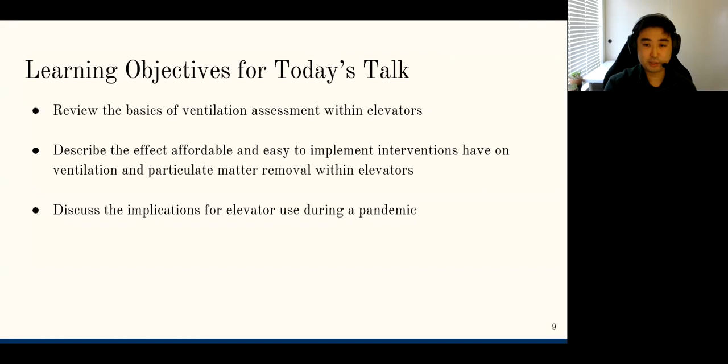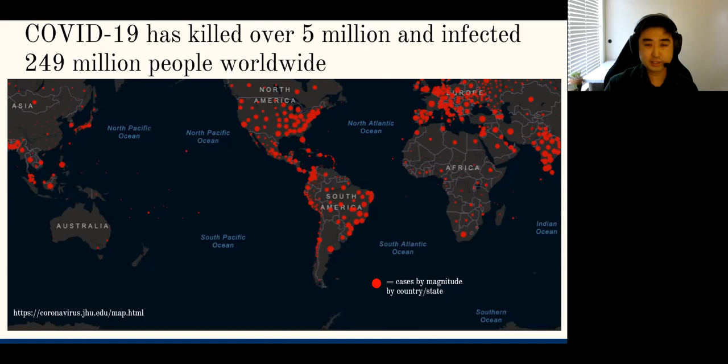So getting into the background and motivations behind this research. COVID has wreaked havoc and created a new normal for everyone in the world and has killed over 5 million people and infected 249 million people worldwide as of November 2021. It's well established that the SARS-CoV-2 virus is transmitted through the aerosol route in shared spaces.

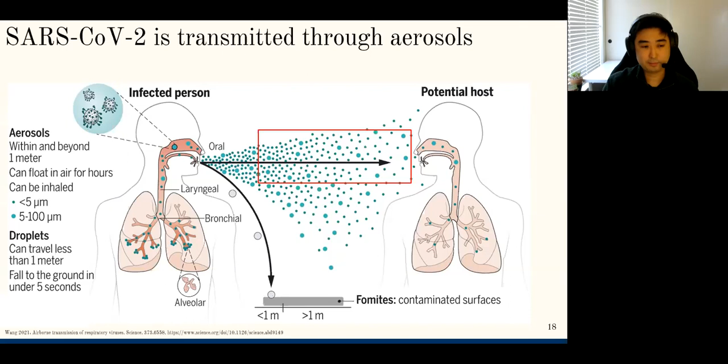The SARS-CoV-2 virus itself is 0.1 to 0.2 micrometers in aerodynamic diameter, but is often larger because it is contained within respiratory aerosols or droplets emitted from people, which typically are larger. And it varies based on the source of the aerosol or droplet production, i.e. a cough versus a sneeze versus just breathing.

And we care about the size because it affects how long it stays in the air, how far that aerosol can travel, how quickly it falls out of the air, how it interacts with the airflow, where in the lung the PM deposits, which relates to the health effects, and how it's removed from a given space. This last point, how it's removed from a given space, is what I'll be focusing on in today's talk.

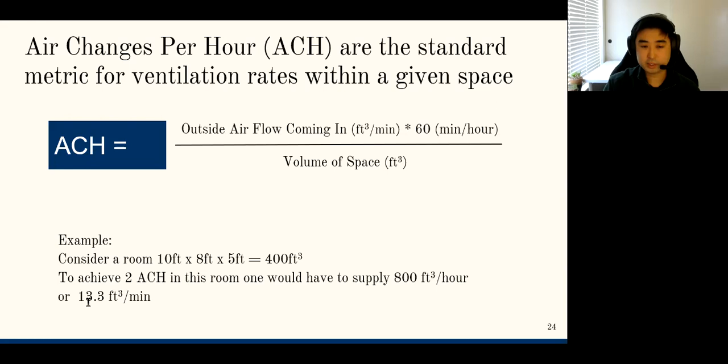So for our study, the air change rate or air changes per hour is the decay rate of aerosols or tracer gases as their proxies for ventilation inside of an elevator. By understanding decay rates of particulate matter and tracer gases inside an elevator, we can calculate the air change rate. This is a very important concept for today's talk. By measuring the rate of decay of these aerosols or particulate matter or tracer gases inside the elevator, it gives us an idea of the ventilation.

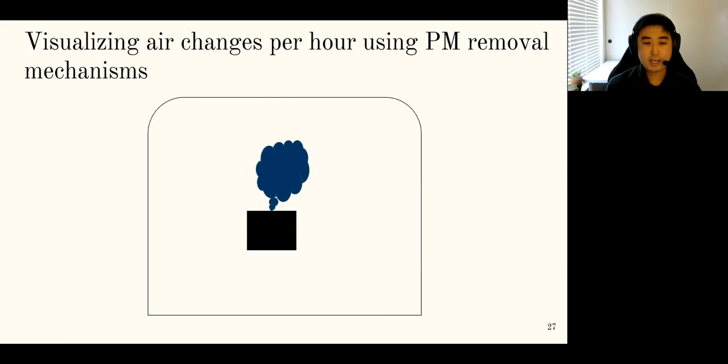So visualizing air changes per hour using particulate matter removal mechanisms. Let's just say this is an enclosed box with some outlets for air, and you have a particle generation source in the middle, as shown with the black box. For these particles to be removed from the space, there are four first order PM removal mechanisms that we'll be focusing on today. The natural ventilation, which is the method of supplying outdoor air into a space using non-mechanical forces. Escape through cracks. Think of like an open window or grates. And this is relevant for smaller particles and larger particles.

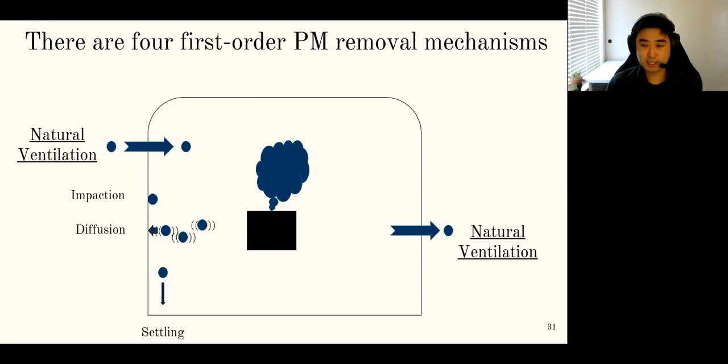Next, we have gravitational settling of particles, and this is relevant for larger particles that fall out due to gravitational forces. Next, we have impaction of high inertia particles impacting onto the surface of elevator walls. And then finally, we have diffusion, which is the random motion of gases and very small particles in air, and then they deposit on the wall. Since this applies mostly to really small particles, it's perhaps less important in today's talk, but it is overall an important mechanism for virus removal. And together, these three, impaction, diffusion, and settling, are called deposition.

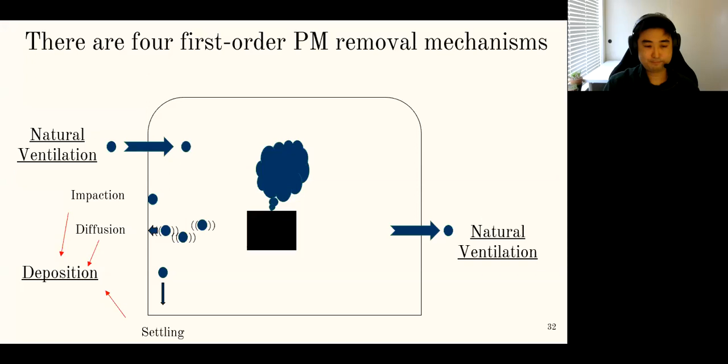However, it's also important to acknowledge there are other methods of PM removal, such as interception and electrostatic effects. But these three have been found to be most relevant for this type of study. So again, an important concept from that previous section is by measuring the rate of decay of particulate matter and tracer gas inside an elevator, we can calculate the air change rate. So now that we've talked through a bit of the background information for today's talk, let's talk about the project overview.

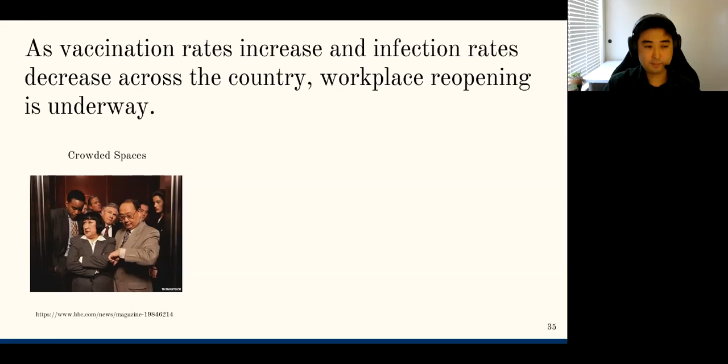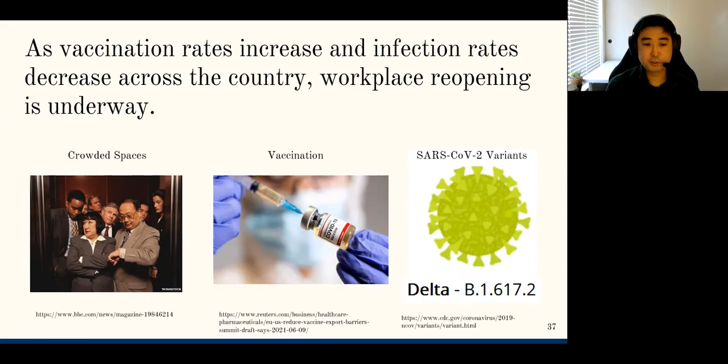We're amidst workplace reopenings, and crowded, close contact, and poorly ventilated indoor spaces are of greater concern due to well-documented airborne transmission of SARS-CoV-2. But ventilation and infectious particle removal within crowded elevators are not well understood. Potential exposure within these elevators is a concern for the virus. With the development and wide distribution of vaccines, people are returning to the workplace. However, with the emergence of highly infectious variants of the virus, potentially lower concentrations of aerosol might pose higher risks than previous variants, and combined, future research should be done to determine ventilation rates and PM removal from elevators.

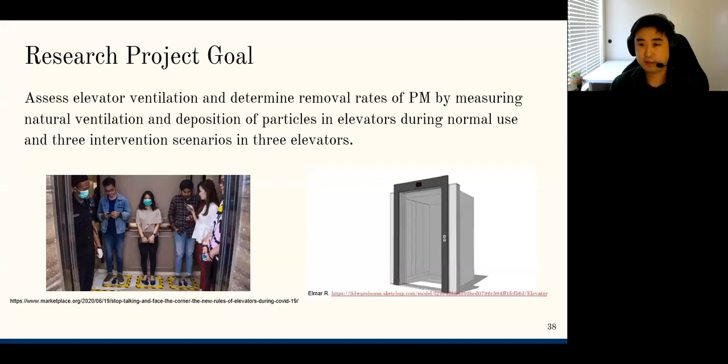So the research project goal is to assess elevator ventilation and determine removal rates of PM by measuring natural ventilation and deposition of particles in elevators during normal use and 3 intervention scenarios in 3 elevators. So here's some elevator use statistics. Well, first of all, elevators are ubiquitous. In the US, there's an estimated 900,000 elevators, serving an average of 20,000 people per year.

Collectively, US elevators make 18 billion passenger trips per year. The majority of these elevators are within commercial, retail, or residential properties, averaging 4 to 5 floors, or an equivalent of 40 feet. Each elevator averages about 5 people per trip.

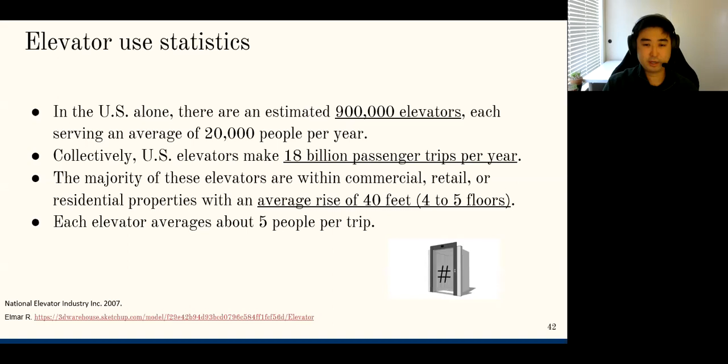So why do we care about ventilation and PM removal in elevators? As outlined before, elevators are potentially crowded spaces that have complex and variable ventilation scenarios. Riders are potentially vulnerable to exposure. Some evidence of indirect elevator transmission early on in the pandemic was found in China, which found indirect transmission in a shopping mall among symptomatic and asymptomatic cases. There are also concerns from the public about the safety of riding in an elevator amidst a pandemic.

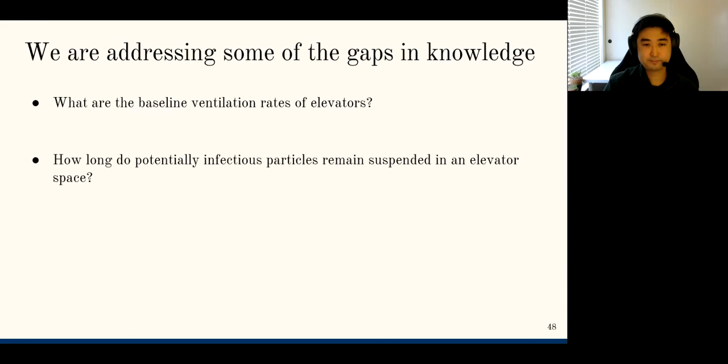We're addressing some of the gaps in this knowledge, such as what are the baseline ventilation rates of elevators? How long do potentially infectious particles remain suspended in an elevator space? And what interventions increase ventilation rates and by how much? Our hypothesis is that easy to implement interventions will increase the ventilation rates inside an elevator compared to baseline ventilation.

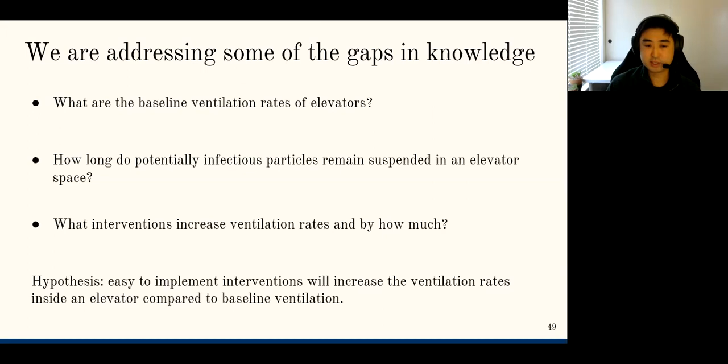So what do we examine? Here's the experimental campaigns. 3 elevators were investigated in the San Francisco Bay Area from August of 2020 to January of 2021. These 3 elevators were chosen based on the year of construction. After talking to a few elevator consultants and elevator technicians, when an elevator is installed, most of the time the cabin or ventilation isn't really altered unless it's required. Usually control safety panels are the things that are updated and changed in elevators. So this was part of the motivation behind choosing 3 different elevators.

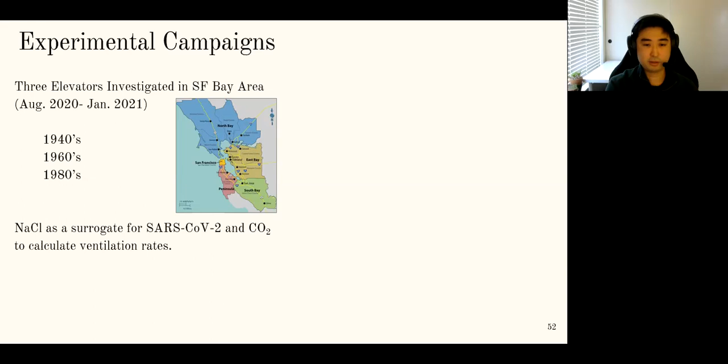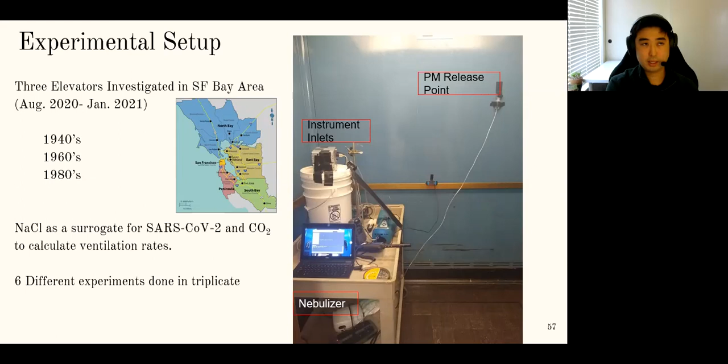Sodium chloride was used as a surrogate for SARS-CoV-2 and CO2 to calculate ventilation rates. 6 different experiments were done in triplicate. On the right here is our experimental setup in one of our elevators. Let's start at the top left. Here's the instrument inlets, and these were placed in the breathing zone, which we represented as about 5 feet. Next, we have the nebulizer in the bottom left, and this is what created our aerosol inside the elevator. And finally, the release point of this aerosol to increase the concentration inside the elevator.

Next, I'll outline some of the normal use experiment approaches that were used to capture the elevator phases. You can think of an elevator as stationary, just sitting, waiting for a passenger with doors closed. This represents the time in between riders. The purpose of measuring the stationary phase is to see what the baseline ventilation is without riders, without any movement, just the elevator sitting there.

Next, we looked at a moving elevator. For these experiments we moved the elevator from the bottom floor to the top floor and back for at least a few trips. I believe we did it for a few minutes. The purpose of measuring the moving phase was to see what the baseline ventilation during a moving phase was.

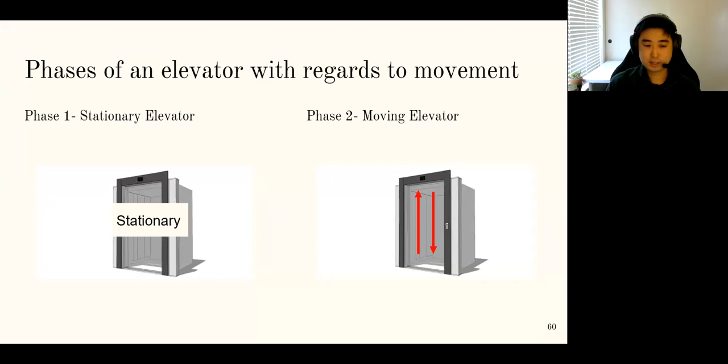So we can get two things from having both these phases: we can see the difference in ventilation between a stationary elevator and a moving elevator, but also we can use these as a piece towards recreating an elevator scenario at a later time in terms of PM removal.

Our first experiment was using CO2 inside a stationary elevator to determine the natural ventilation. Here's a general overview. Let's say this box is an elevator. Natural ventilation is moving air both in and out due to non-mechanical forces. CO2 was used to estimate natural ventilation because it's an inert gas. It's not chemically reactive. It doesn't deposit onto walls. It can only really be removed through natural ventilation or through grates or cracks in the elevator. So by measuring the rate of decay of the CO2, we can get the natural ventilation of this elevator.

Our second experiment calculated the ventilation rate by measuring the decay of aerosol inside the stationary elevator. The particles are removed primarily through deposition. So by measuring the rate of decay, we get the ventilation rate. The third normal use experiment has that same scenario of having aerosol particles inside the elevator and observing the decay, but instead of just having the elevator sit there, we move the elevator.

So I'm going to go in a bit more detail for experiment 1, and all the following slides will go into more detail of the experiments. So again, as previously mentioned, natural ventilation is moving air in and out of a space using non-mechanical forces. And to measure the natural ventilation in a space, a tracer gas, CO2, again, can be used.

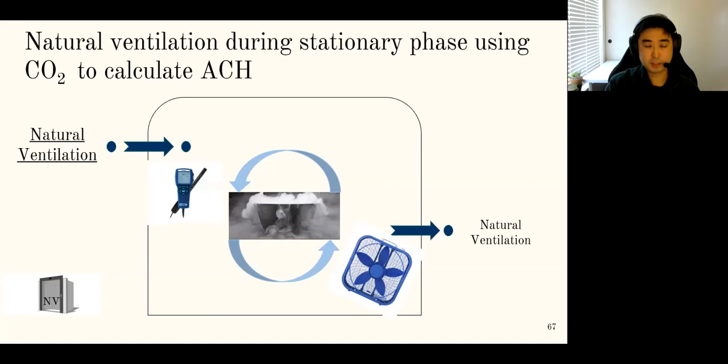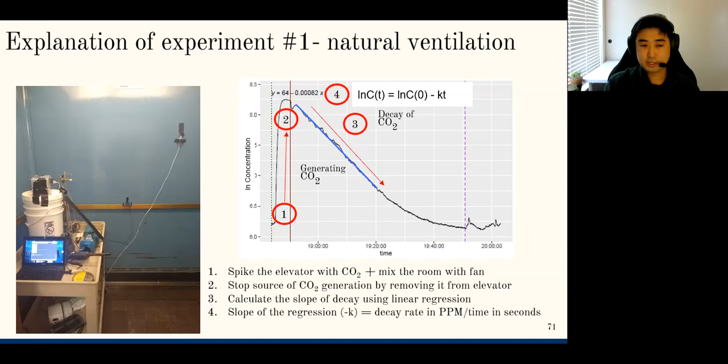And here's the output of that regression. And the important piece that we're trying to get from this regression is the slope, which is the K value up here. And what that represents is the natural log concentration of the CO2 over the time period that we're looking at, as denoted by this blue line. So this is the rate of decay of the CO2 inside the elevator. So that's really important. This rate is in ppm per second, and we convert that to air changes an hour given here.

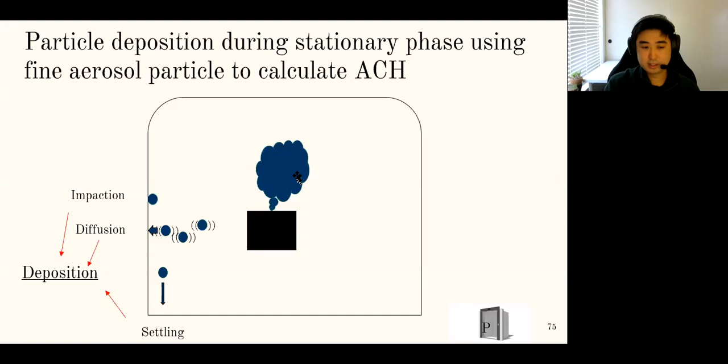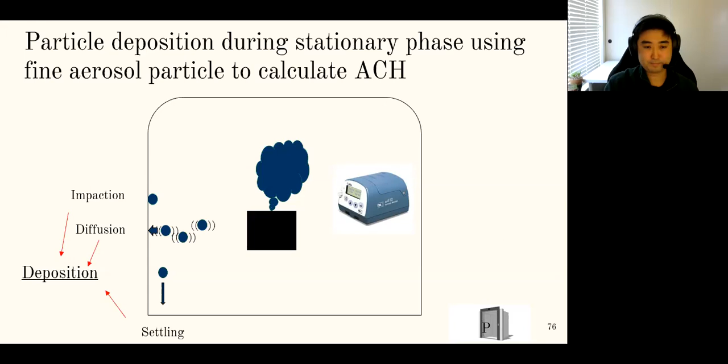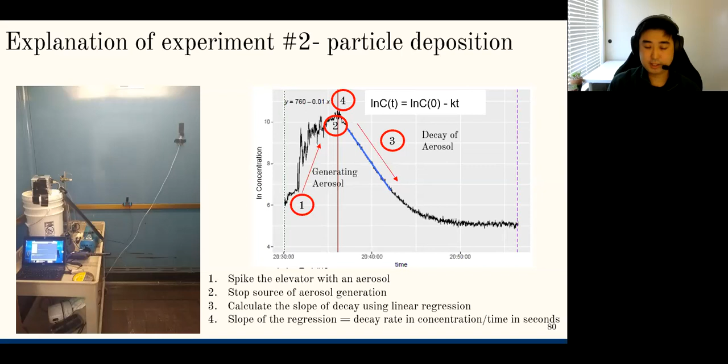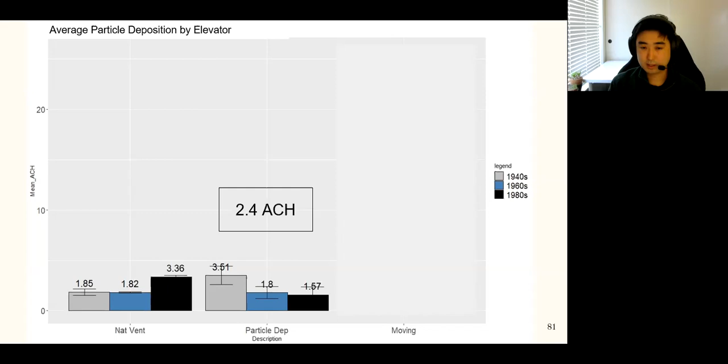Next, after 5 minutes of generation, a sufficient concentration was reached and the generator was stopped. Then the decay of the aerosol was measured using a regression, and the output of the regression was in concentration, or milligrams per cubic meter per second. And again, this rate of decay is our ventilation rate. And we changed that to air changes an hour. And what we can see is in our 1940s elevator, we got about 3.51 air changes an hour, our 1960s 1.8, and our 1980s 1.57. And on average, we had 2.4 air changes an hour between all three elevators.

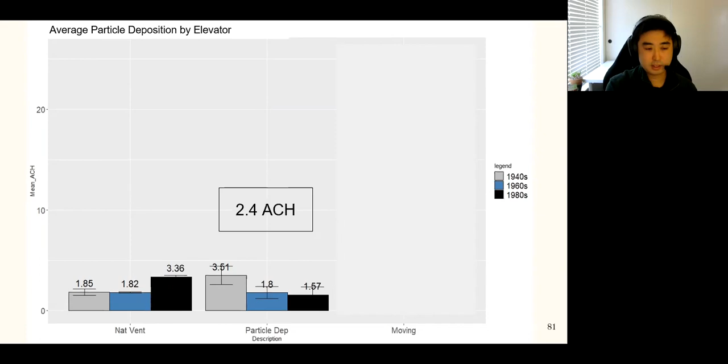So here's what we have. On the y-axis, it's the percent of particulate matter remaining inside an elevator at breathing zone. This is just a percentage. We're not going into actual concentrations, but just a percentage of a concentration. And then time is on the x-axis. What this shows is with the natural ventilation, which is our first experiment, and particle deposition, which is our second experiment, this is our baseline removal. The red line denotes the 50% removal of this PM. And what we see, it takes about 9 minutes to reach 50%.

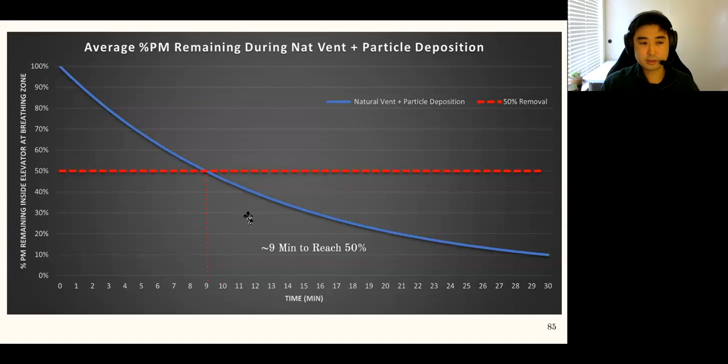I'll be repeating this with our other experiments too, but I think it's an important tool to visualize what that actually means for PM removal. Our air change rates and visualizing them this way are all small parts of a larger puzzle that I'll talk about a bit later for future direction research.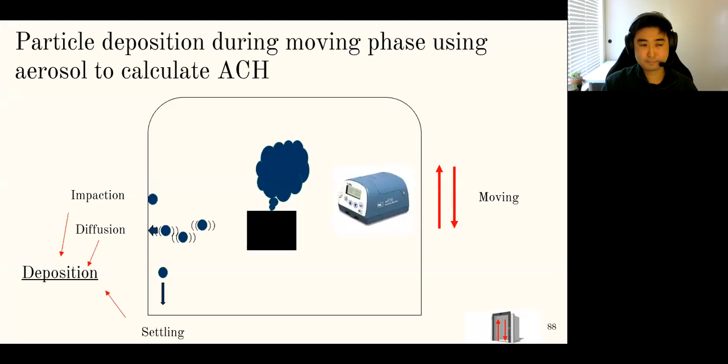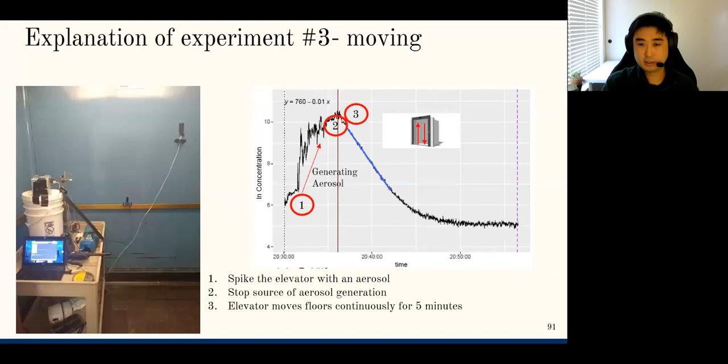So next, the third experiment, which is normal use. We're looking at when the elevator moves. Again, the elevator was spiked with a concentration of an aerosol, and then the elevator was moved and measured using a SidePak in milligrams per cubic meter. This is going to look familiar, but the elevator concentration was increased for 5 minutes. The source of aerosol was removed or turned off. The elevator was then put into a continuous moving cycle, and while it was moving, the decay of the aerosol was measured.

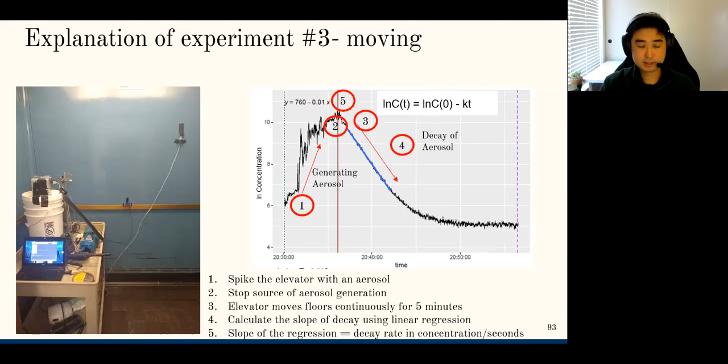And then you get an output. Again, the slope from this equation is the important piece, and that's our ventilation rate. Notice when it's moving, compared to stationary phases, which we see on the left, the average is 18 air changes an hour, which is on average almost a 6 to 9-fold increase, which is pretty big. In our 1940s elevator, we have 24 air changes an hour. Our 1960s, about 11 or 12, and then 1980s was about 17 to 18.

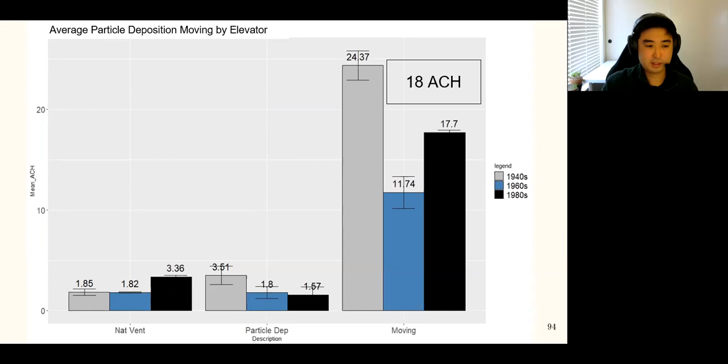So again, to put this into context, this scenario represents if someone were to cough into an elevator, get off at the bottom floor, and someone were to recall it at the top. This is the rate that you would observe. In future research, I will talk about how to reconstruct that into multiple different scenarios at once. So now let's go into the intervention experiments.

And again, they're aimed at enhancing particle removal. So the first intervention was propping the door open of the elevator, and we propped the door open for 5 minutes after spiking the elevator with aerosol and observing the decay.

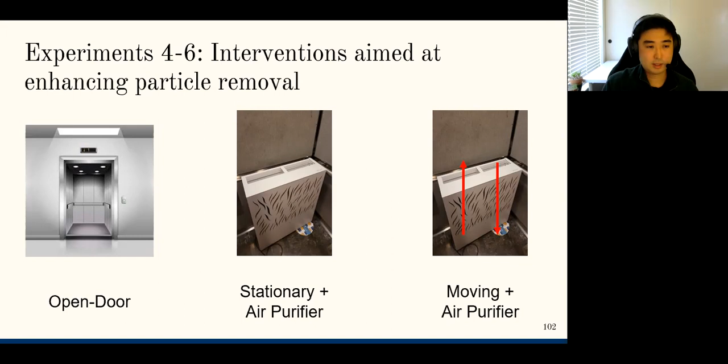And here's the fourth experiment more in detail. Again, here's the elevator with a particle generator in the middle and an open door, and that would be our hypothesis. It would increase the ventilation inside the elevator. And then the SidePak to measure the concentration over time.

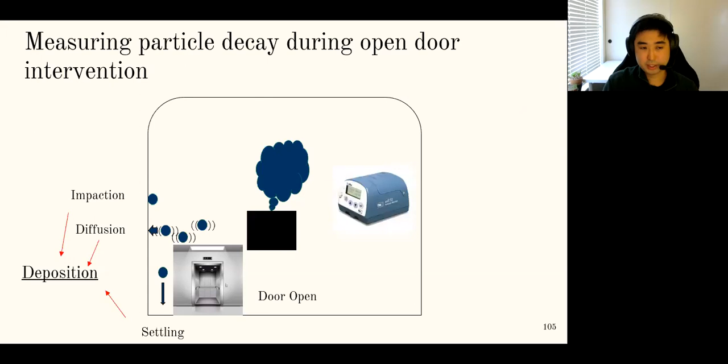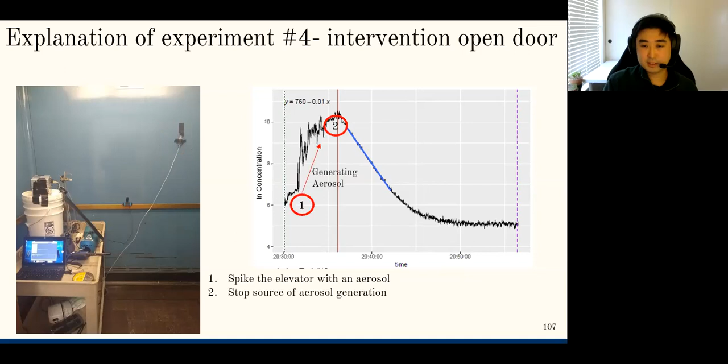And again, we spiked the elevator with the aerosol, and then once the concentration was sufficient, we opened the door for 5 minutes. Meanwhile, while the door was open, we took the decay of the aerosol from the elevator. And the output again is the slope.

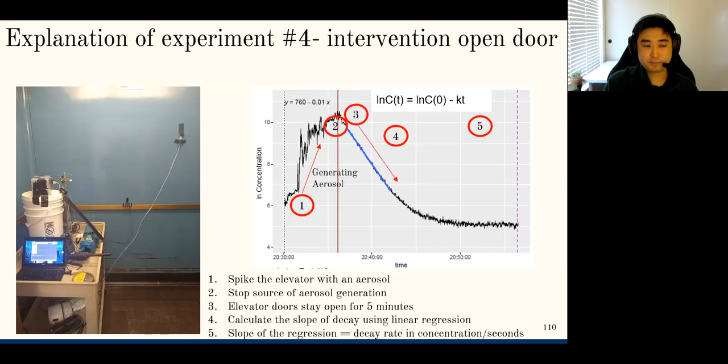And the reason for that, we're still investigating, but it's interesting to note that an open door does increase ventilation compared to normal scenarios. And again, taking that ventilation rate and putting it into this equation so that we can visualize it. And again, notice that this is the fourth experiment.

And remember the baseline, the blue line of natural ventilation particle deposition took about 9 minutes to reach 50%. However, with open door, it takes less than 1 minute to reach 50%, which is quite quick. And I'll talk more about that more in depth a bit later.

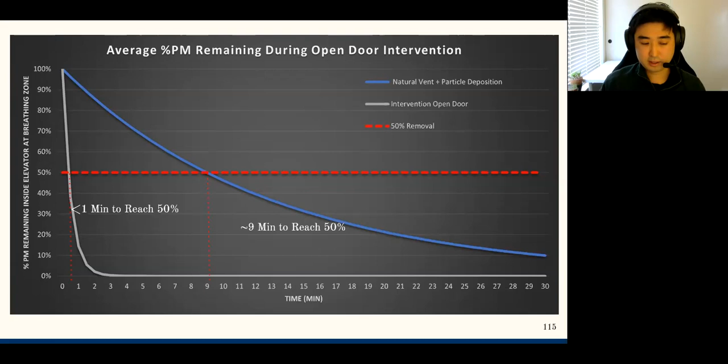But again, this scenario would be if someone in the elevator were to emit into the elevator and then prop the door open. This is what we would observe. So the fifth experiment is another intervention. It's looking at the stationary elevator plus an air purifier.

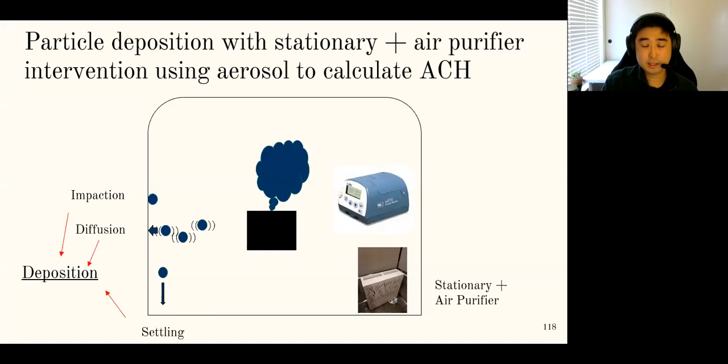Again, here's the elevator with a particle generation source, and we add in a portable air purifier into it. And we measured this again using a SidePak. And to calculate the settling and deposition of the particles within the elevator, an aerosol was generated for 5 minutes. Once a sufficient concentration was reached to observe a decay, the source was turned off. Then we turned on the air filter inside the elevator and observed the decay.

And again, the slope of this decay is our air change rate in concentration, or milligrams per cubic meter per second. And as you can see, the range was 20 to 34 air changes an hour between elevators. And something interesting to point out here too is in our 1940s elevator, there virtually wasn't any difference between the open door scenario, which had 33, and adding an air purifier, which is quite interesting.

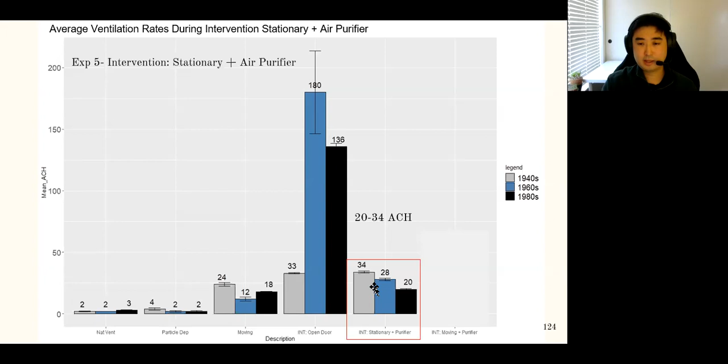And I think, like I mentioned before, we're still looking into the data and seeing what is the reason behind this difference between the three for the open door scenario, and why the air purifier intervention is similar. So again, we take that air change rate, the average of the ones previously shown, and put it into this exponential decay equation so we can visualize the PM decay.

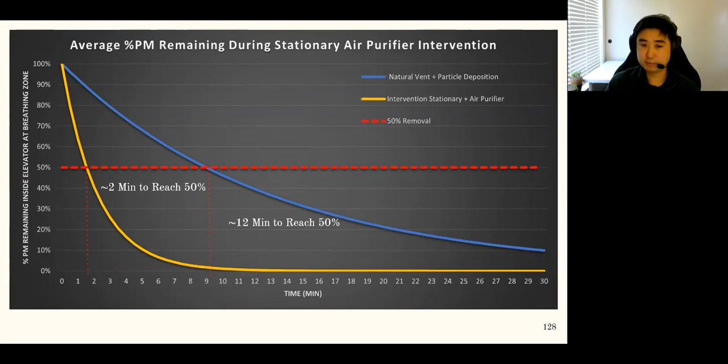And blue's baseline, this should actually say 9 minutes, but what we see is about 2 minutes to reach 50% concentration, which is still an improvement. All right, and now on to the last experiment, which was using the air purifier plus moving the elevator.

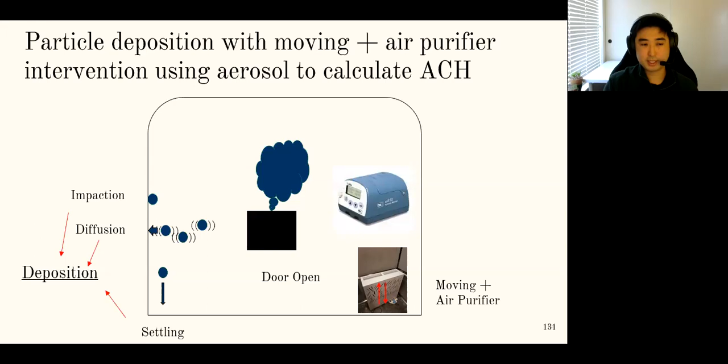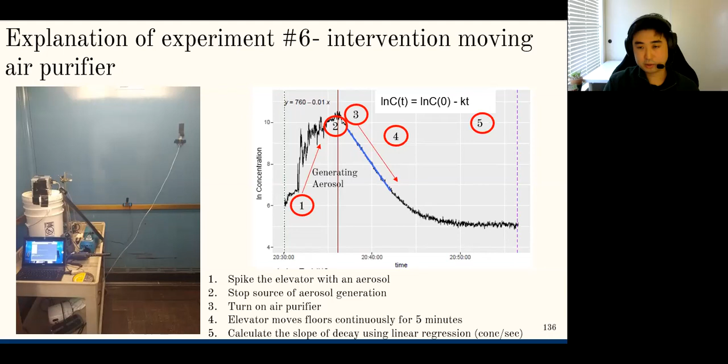Again, here's the elevator. We'll increase the concentration inside of it, add an air purifier, and then, while the air purifier is running, have the elevator move, and it will be measured using a SidePak. So the concentration inside the elevator will increase for 5 minutes to get us to a sufficient concentration. The air purifier was turned on, and the elevator was moved. And the decay of the concentration of particles was observed, and this decay is our ventilation rate.

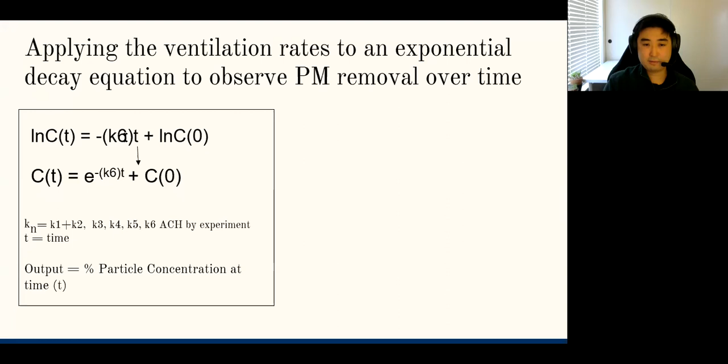And again, if you're to compare this to our other interventions, to our baseline or our normal use scenarios, it's still an increase. And between interventions, I will talk about shortly. So again, taking that average ventilation rate, putting it into this exponential decay equation to visualize it, what we see is about a minute to reach 50% concentration.

And like previously, this represents if someone were in an elevator with an air purifier, they were to emit into the elevator, get off the elevator at the bottom floor, and someone at the top floor recalled this elevator. This is what this represents. And again, I really want to emphasize, these are all pieces of the puzzle. The purpose of these experiments was to isolate specific aspects of an elevator so that we could recreate different scenarios.

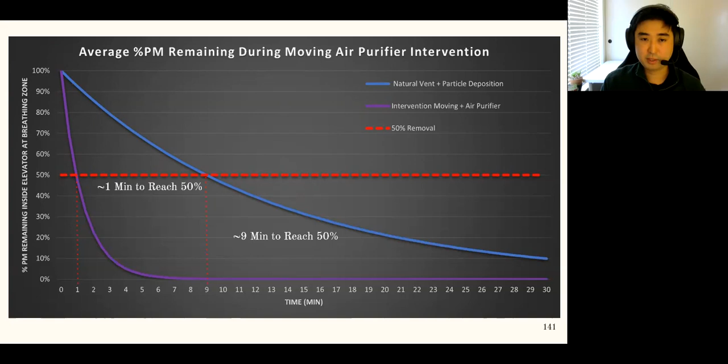So let me talk about the summary and discussion of the findings. As you can see, the elevator exhibited a wide range of ventilation rates. The range of the average air changes per hour was 2 to 116. And generally, moving and interventions increase ventilation rates. So everything from here on compared to these two increase the ventilation rates. We also observe differences between elevators, between different eras when they're built.

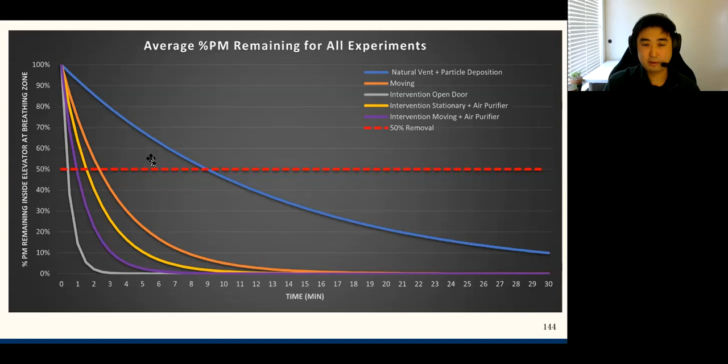And the removal of PM through air changes shows that interventions are improvements upon a stationary elevator, as shown here on the left, the interventions and the normal moving scenario versus the baseline experiment. So now to compare the interventions of the open door versus the air purifier: the average ventilation rate of the open door experiment was 116 air changes an hour, and the average ventilation rate of the air purifier while it was stationary was 27.

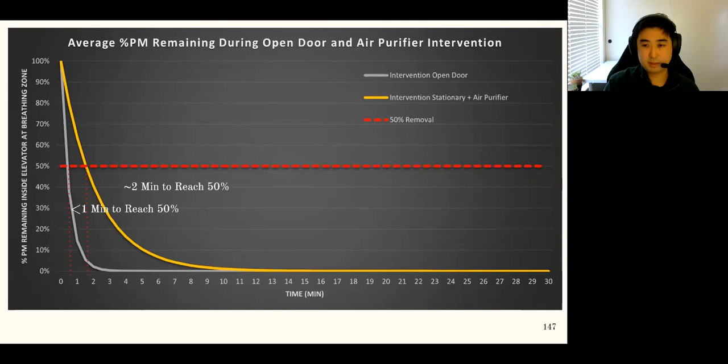And I think the takeaway from this, it's really interesting to see that the air purifier during a stationary elevator seems much smaller than an open door scenario. But what does that actually mean? During the open door scenario, it translates to less than 1 minute to reach 50%, whereas if you have an air purifier in there, it's about 2 minutes to reach 50%. And again, these are both during stationary phases. So it's important to consider these for recommendations for elevator use, that both of them seem to be useful in removing PM inside an elevator.

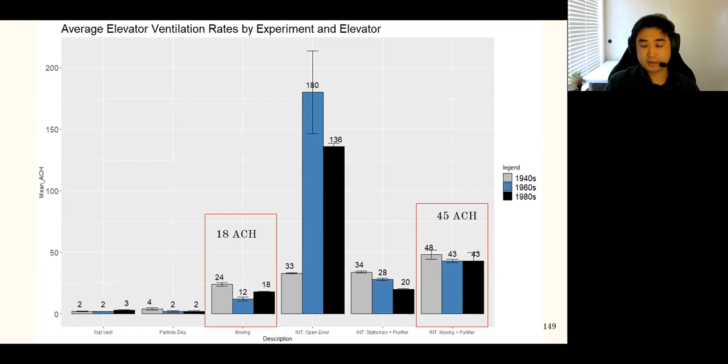And then comparing the normal use moving scenario versus the intervention moving scenario. The ventilation rate during the normal moving experiment is less than half that of the intervention scenario of adding the air purifier while the elevator is moving. And basically the take home from this is that the air purifier improves ventilation compared to normal use. And this visually represents it as well.

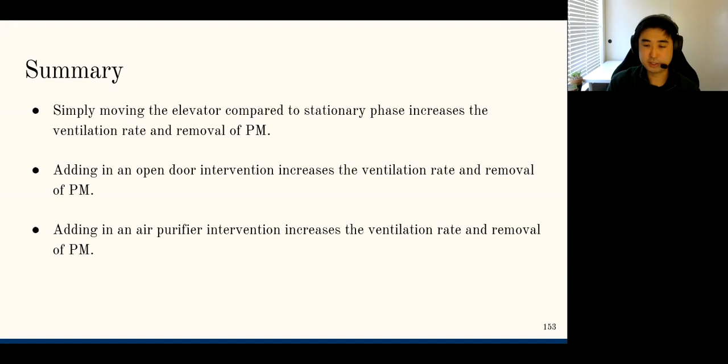So to summarize everything, simply moving the elevator compared to having it just stay there increases the ventilation rate and removal of PM, which makes sense. Adding in an open door intervention increases the ventilation rate and removal of PM. And adding in an air purifier intervention increases the ventilation as well. So in terms of general discussion, some research gaps that were addressed in the study were: what are the baseline ventilation rates of elevators? How long do potentially infectious PM remain suspended in an elevator space, and what interventions increase ventilation rates, and by how much?

And in further discussion of the interventions, the open door and air purifier interventions improve ventilation rates and PM removal. But in talking with some building managers, elevator technicians, and an elevator engineer, having an open door intervention might not be as feasible as we originally thought when we planned these experiments over a year ago. The reason behind that is ultimately safety. You can't prop a door open. It might change the recall. Someone might trip over what you're propping it open with. It wasn't really generally recommended. So it might not be as feasible to use that intervention, and the air purifier intervention is our recommendation.

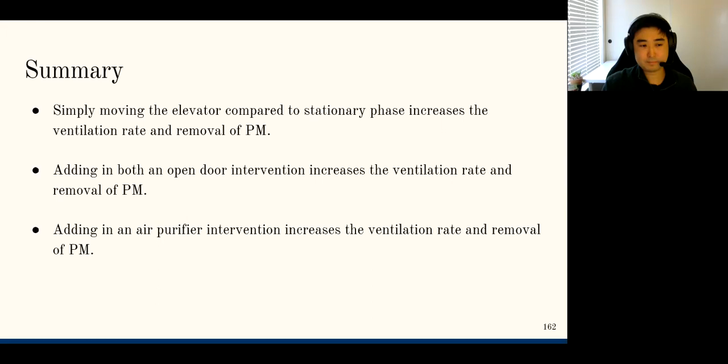And some strengths of this study are primary data collection or empirical data during realistic scenarios, an industrial hygiene perspective towards this, which is how can we actually apply this in a real setting, and how can we work with stakeholders that are involved with elevators and ventilation in buildings, so that not only can we do thorough science, but how can we actually implement it so it's actually used? And then focusing on representing PM from a breathing emission and not on cough simulations. And then testing easily implemented and cheap interventions for elevators.

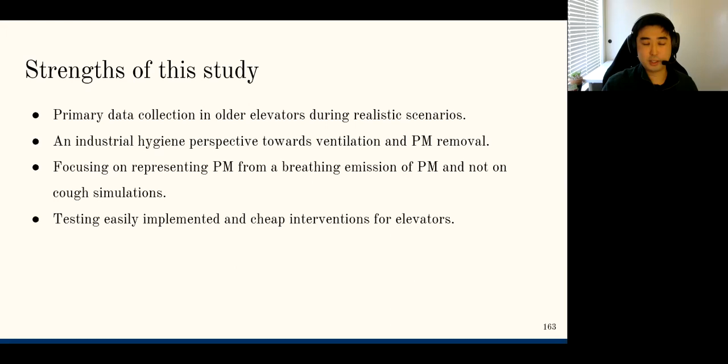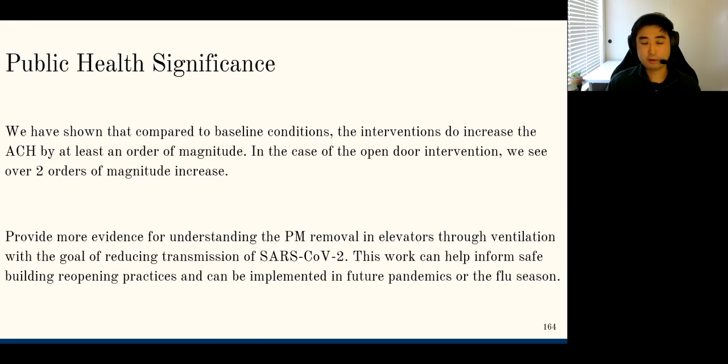And again, none of this is possible without all these wonderful scientists and elevator experts. And are there any questions?